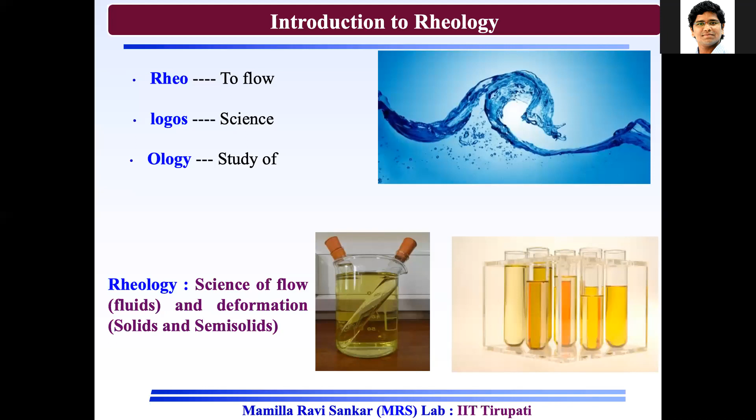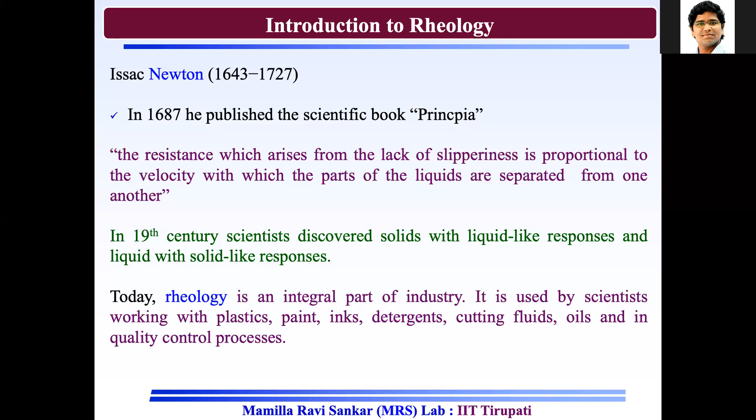Today, rheology is an integral part of industry, and now it is also an integral part of academia, because many academics, especially chemical engineers, biotechnology people, and nowadays mechanical people also use a lot of rheology for their research. So people know what rheology is.

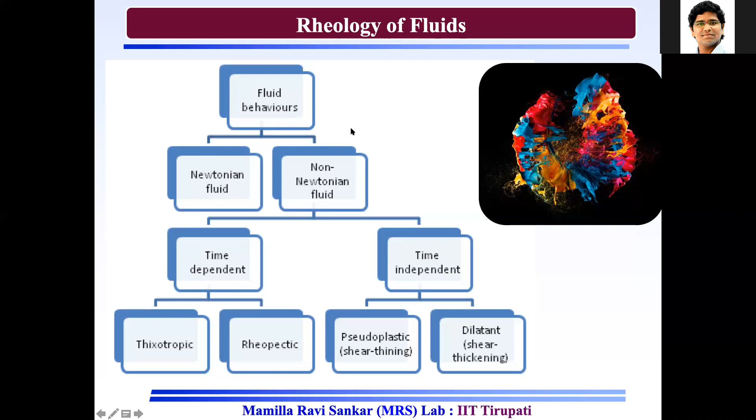Okay. But what I can suggest to you is, in most cases, people talk about the non-Newtonian only, because most of the things that we daily encounter are basically non-Newtonian fluids. If you see here, shear rate versus viscosity, or some people also plot shear stress. You can see this is proportional. Normally in rheology, people say shear rate. So always one word in between shear and rate is missing. Okay, but in common language, they call it shear rate, but it is called shear strain rate. So whenever I say shear rate, it means shear strain rate. Okay, so when shear rate is proportional to viscosity, normally you can call it a Newtonian fluid.

So as the shear rate increases, if the viscosity goes down, if you can see here, that is called a shear thinning fluid. If the viscosity increases, that means shear thickening fluid. How the viscosity increases, how viscosity decreases, and other things you will come across in the upcoming slides.

If you know how a rheometer looks like, then you can understand what the shearing effect is and whether this shearing effect is decreasing the viscosity or increasing the viscosity. If it is decreasing, what is the phenomenon? If it is increasing, what is the phenomenon? And other fluids are, you can see, Bingham plastic fluids and other things. In the Bingham plastic fluid, normally these are the Casson fluids.

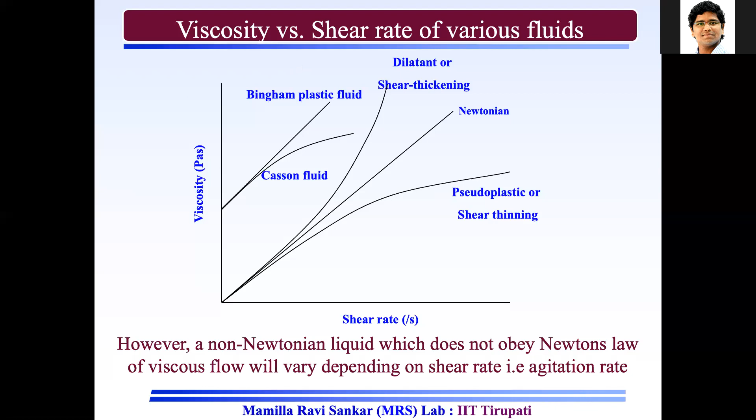These are viscoplastic fluids. Okay, so you can see they are starting at a certain point on the y-axis. Okay, so that is nothing but your minimum viscosity or the shear. Normally it should be a shear stress on this y-axis. If you assume that you are taking a paste and putting it on a brush, unless you exert some pressure or some stress on it, the flow of the paste won't start. That is the best example for these Bingham plastic fluids. Okay, so that is a common example.

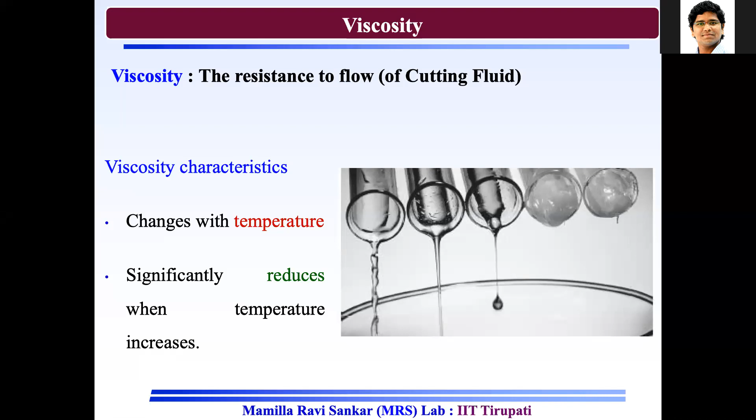So viscosity, as you can see here, is a resistance to flow. As you are seeing in this particular picture, the flow of the fluid is very high in the first one. As you go on to the last one, the flow of the fluid is minimal. I cannot say zero, it is minimal. That means the viscosity is increasing gradually. So how to measure rheology, or how to measure various rheological properties, that we will see in the upcoming slides.

So there are tests. In olden days, people used to do rheological characterization by qualitative tests. A qualitative test means, for example, X person is a good boy. Okay, that is a qualitative statement. What is a quantitative statement? X person is 80% good boy is a quantitative statement. So people in olden days followed qualitative tests.

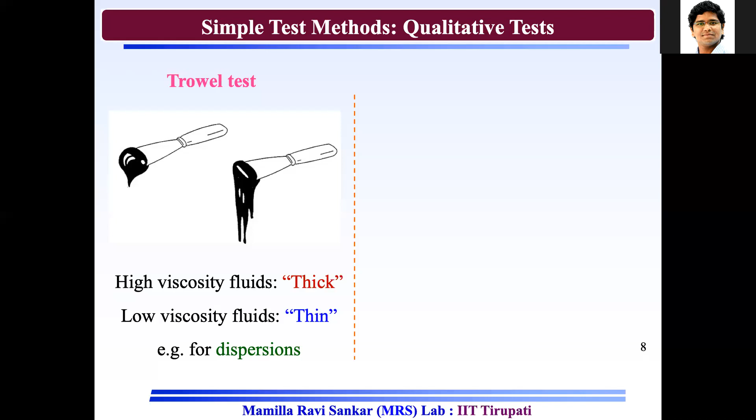How? That is called the trowel test. What they will do is take a trowel, pick up the fluid, hold it for some time and observe it. The only thing they can say is, they cannot give the quantitative value, for example, 100 or 200 or whatever. Okay, they can say whether it is a thick fluid or a thin fluid. That much is called qualitative. They can say this is a thick fluid or it is a thin fluid.

So there is another test. If you don't have the trowel and other things, you can do the finger test. So tacky for long distances, less tacky for shorter distances. Okay. So don't do this finger test because of the COVID effect and other things going on. Okay. So olden days people were not aware of all these things and they used to do it. So this is one of the conventional ways of qualitative testing.

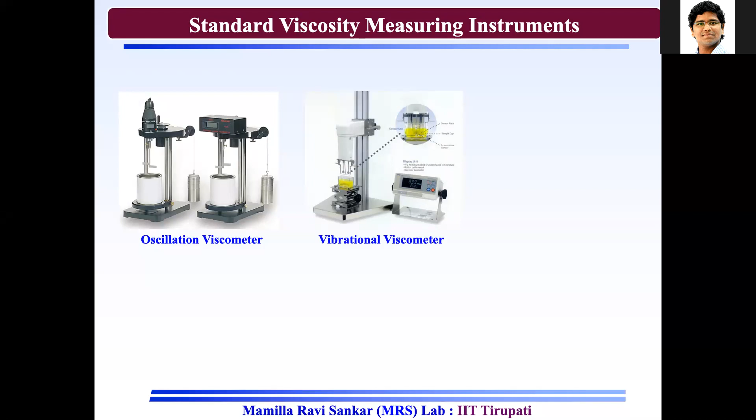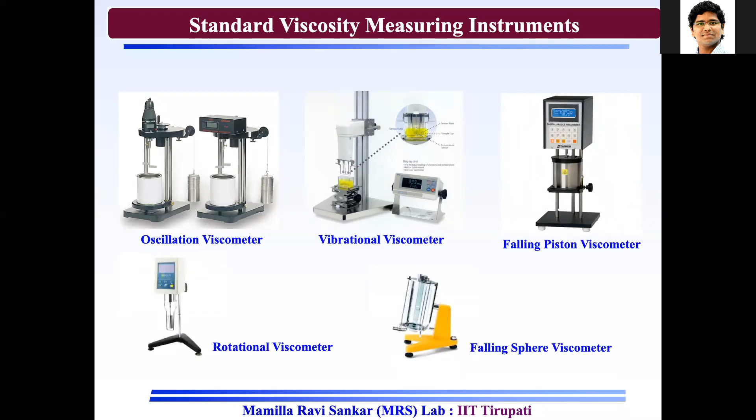Okay. Standard measurements were found later, because whenever your customer comes to you, they will ask what is the viscosity of it, what is the shear stress or shear strength of this particular material and other things. Okay, for that, as time progressed, quantitative measurement techniques came. One is the oscillation viscometer, vibrational viscometer, falling piston viscometer, a rotational viscometer, as well as a falling sphere viscometer. These are the varieties, particularly for the measurement of rheological properties. Among all these, nowadays the most popular is the rotational viscometer.

Okay, in the rotational viscometer, you can go with TA Instruments or Anton Paar or any type of commercially available rheometers. Most of the people will go for three common geometries: parallel plate geometry, cone and plate geometry, and concentric cylinders. Whenever you have a liquid, you should prefer concentric cylinders. You can also prefer cone and plate, but cone and plate and parallel plate are normally preferred for semi-solids.

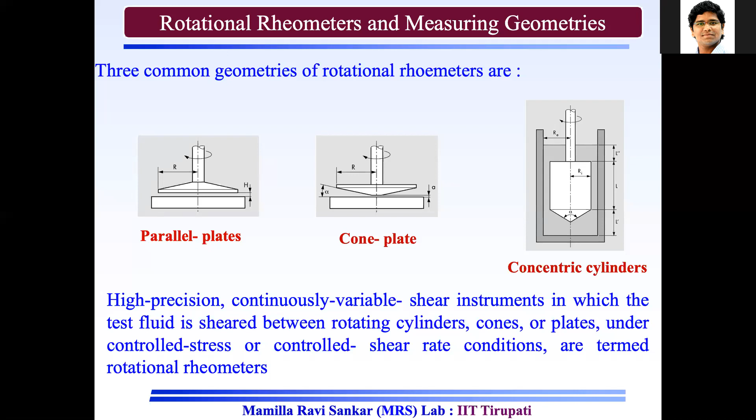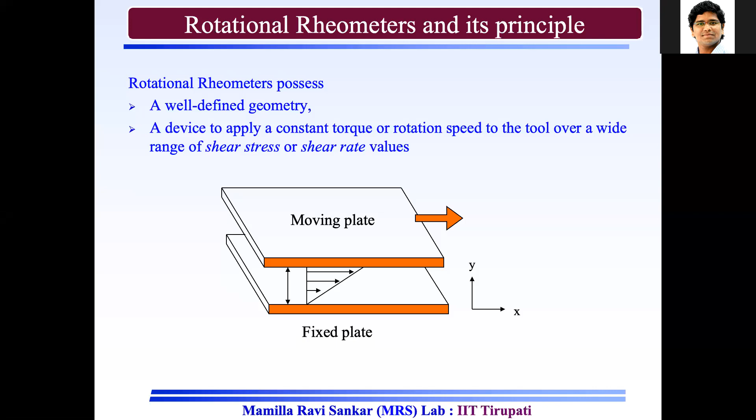Okay, so this is about the geometries that you can use, particularly for the basic characterization of the rheological aspects. As I said, rotational rheometers are mostly used across the globe. That's why I am concentrating mostly on rotational viscometers. At the same time, most of the fluids that one person or many persons come across in daily life, from eating food to all the things, are mostly viscoelastic fluids. That's why most of my presentation goes with viscoelastic fluids with rotational type of rheometers. Okay, so why are rotational rheometers mostly famous? These are well-defined geometry, and this device applies constant torque or rotational speed, and it maintains symmetry, and many advantages are there that you can see in the upcoming slides.

There are multiple modes in the rotational viscometry or rotational type of rheological characterization. Whatever you are seeing is an Anton Paar, which is one of the world's best-selling rheometers, which we also have in our laboratories. So one is the rotational type where you have a top plate and bottom plate. These things you will see in the schematic images in an upcoming slide. If you can see my cursor here, there is a tool master, and there is a bottom plate. The bottom plate is fixed, and the tool master can be rotatable basically.

Okay, so it can be operated in two ways. One is rotation. That means that continuously you can make a circle out of it. That is for shear stress test and basic viscosity test. Another one is dynamic, called oscillation, that you can give. So the bottom plate is fixed, in between you have a semi-solid medium, and for the top plate you are giving an oscillation motion. Whatever motion you are seeing here is for the top plate only. So these can be tested for the torsional test, tensile test, shear test and other things.

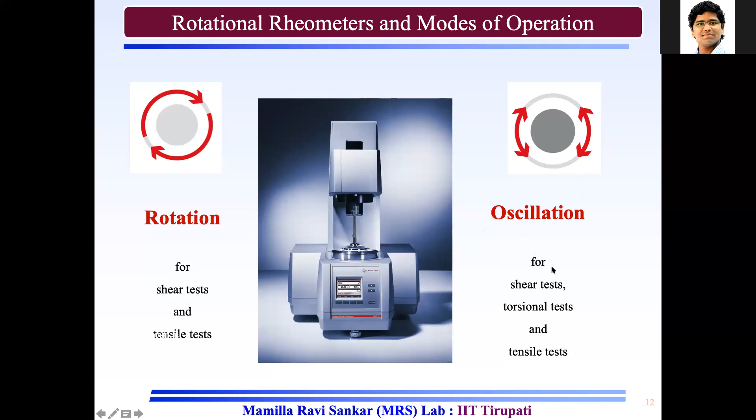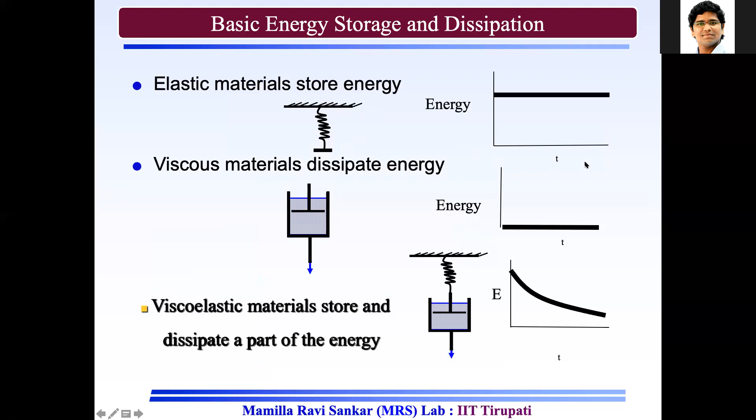So, rheology of viscoelastic fluids. Why are you going to use the viscoelastic fluids? Normally these viscoelastic fluids have two variations: one is viscous and another one is elastic nature. Viscous materials normally dissipate the energy, elastic materials store the energy, but these particular materials have both viscous and elastic natures. How do these things dissipate the energy? Normally these are long chain polymers, represented by polymer networks or polymer chains basically. These chains can store energy if they are elastically dominating. If they have the viscous nature, that will release.

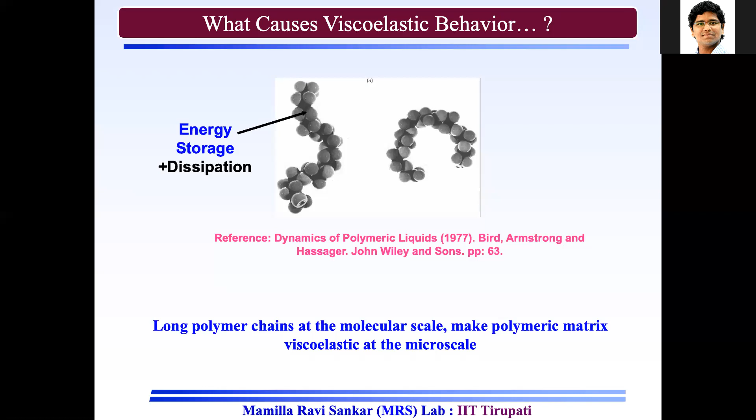Okay, so for example, water is viscous dominating. As you throw it, it will follow the path of whatever direction you give. But if you take an eraser, if you sit along with your children and they are erasing their drawings, and you press on it, what will happen? It deforms in the perpendicular direction. At the same time, it will store the energy inside. Okay. So why are we going for mostly viscoelastic fluids?

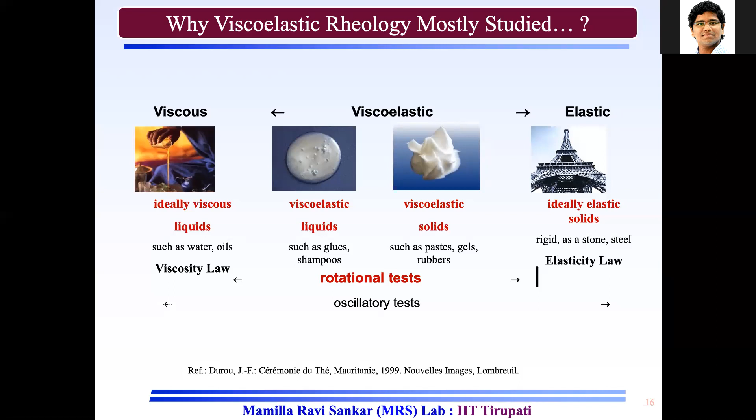As you see, ideal liquid is normally water, and ideal solids are perfect solids. There is nothing like perfect in practice. In between, you come across many materials. Those are all mostly viscoelastic things. In the viscoelastic, you have two varieties: viscoelastic liquids and viscoelastic solids, which is nothing but the semi-solids basically. If you see the range of face creams, whatever you apply, Fair and Handsome, Fair and Lovely, these are all to be tested rheologically, because it has to flow as per the requirement. At the same time, it has to rub against your face. It has to rub against your body. So these are all to be tested properly as far as rheological studies are concerned.

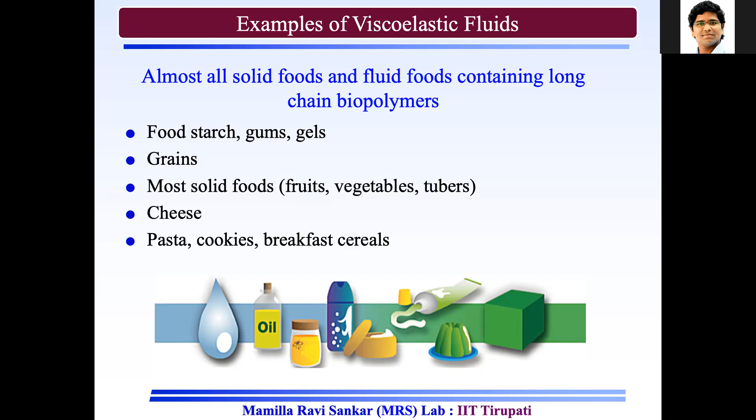Almost all the solid foods and fluid type of foods, ranging from food starch to gums, grains, most of the solid food, cheese, pasta, all come under the one category called viscoelastic fluids. That's why we are concentrating mostly on viscoelastic fluids and semi-solids. At the same time, I will also give you one glimpse of the future of rheology, where people can get some knowledge and go ahead further. That is called biorheology, where bioorganisms and the viscoelastic or rheological fluids are incorporated. That also I will talk about in the final slides. So, three things that I am going to start here.

What are the practical conditions that we exclusively do at our particular laboratory and our collaborators' laboratories? So first and foremost is the basic thing that I want to start, where liquid characteristics are dominating. However, these fluids are slightly viscoelastic. So second is polymer rheological fluids for finishing applications. So these are dominating viscoelastic solid characteristics.

The first one is elastic liquid characteristics. Second one is viscoelastic dominating solid characteristics. Then we will go ahead with bioinks or injectable scaffolds, hydrogels and other things, how the cells and other things can be done by the rheology.

These are the applications. Why I am concentrating, as I said, basic rheology you can get at any time from YouTube and other things. Only thing that you may not get, as per my understanding, is practically how you can use the basic knowledge of rheology in practical applications. Many of the people, when you ask what is a null set, tell the definition, but how to use it in practical situations of sets and relations may not be known.

For example, you can correlate if a person is standing and we take a photograph. So a person is 3D and the photo is 2D. So what about the points that are there on the back side of the human? Those are all points going to the zero of the photograph. So this is how the practical knowledge can be incorporated among the students. So my motto was to explain to you the practical conditions of rheological characterization to the basics of mechanical engineering.

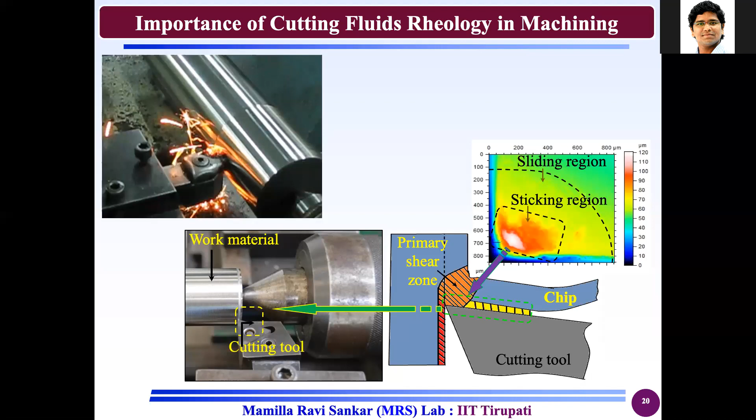Now, I want to use the cutting fluids. If I want to use the cutting fluids, being a basic mechanical engineer, what you will do is just go and use the cutting fluid and measure the cutting forces, temperature and other things. People are not interested in all those things if you are going for a publication. So what I strongly suggest to the people who are observing is, you should also look at the other angles of cutting fluids outside the box of the machining. That is one of the things that you can see, rheological characterization.

And you can use various cutting fluids that you are going to generate. You can generate your cutting fluids as per your requirement. If you know the thermal conductivity and the convective heat transfer coefficient of each particular cutting fluid, you can mix and make a blend. And people nowadays, I am seeing and reviewing many publications on bio-cutting fluids or green cutting fluids. So in this particular case study, what we are going to do is compare the rheological characterization of commercial mineral oils that you can get from the market. For example, I am not branding, Servocut S, Servocut SS. There are many companies.

Bio-cutting fluids, you can develop your own bio-cutting fluids, and the only thing is that you should characterize them properly. In the present condition, what you are seeing is an Anton Paar MCR 102 model, and rheological characterization is done with a concentric cylinder. As I specifically said, whenever you have a cutting fluid or a liquid-dominating fluid, you should always go with concentric cylinders, and this is the concentric cylinder.

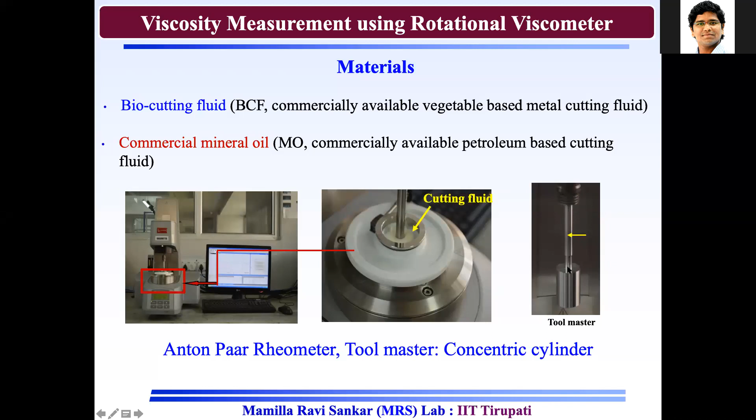As you can see, the cutting fluid is filled as per the guidelines of the rheometer, and this is the tool master, the concentric cylinder tool master. If you see here the shear viscosity, normally you are doing a shear test, so you also observe the shear viscosity versus shear rate. How to measure shear rate and other things you will see in the upcoming slides for abrasive fluids.

Normally shear rate is one of the input parameters that you can give on the rheometer, and you can see the first test is conducted at room temperature, which is about 20 degrees. There is not much change in shear viscosity; it is constant. However, metal cutting fluids normally will experience high temperature. So we also conducted one test at 100 degrees.

You can see the viscosity will increase because in the present condition we are using water also. As the temperature goes up, the water content will decrease, and it will be slightly difficult, from the point of capillary action, to impinge or penetrate into the chip-tool region. Otherwise, what you can use is high pressure coolant systems to penetrate in a much better way.

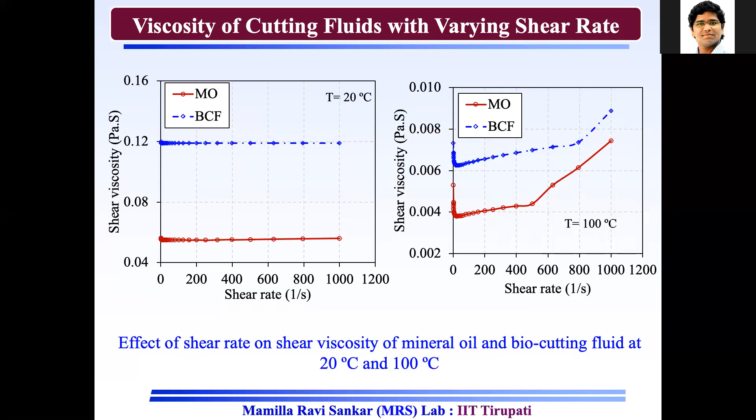You can also check how the viscosity is decreasing and other things. What you are going to see here is the viscosity of the mineral oil and the viscosity of the biocutting fluid. Both are approximately similar in range. Why I am saying this is, if you look at the sustainable aspects of machining, you always prefer to go for biocutting fluids.

There is one conference, at BITS Pilani campus, but they are organizing it in Jaipur, on sustainability issues. That is one of the big conferences organized by CIRP. People who are interested can look at it. Unfortunately, the last date is tomorrow only. I was just informing you; life cycle assessment and other things people do.

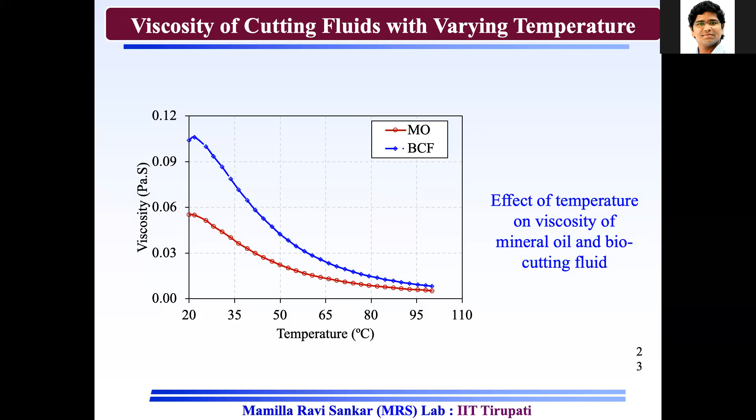From that temperature analysis, you can calculate the activation energy, the apparent activation energy. You can calculate it for BioCut using these equations, which is the Arrhenius equation. What I mean to say from this data is that the activation energy is the energy provided to the cutting fluid. You have two fluids, one is the biocutting fluid, another is a petroleum-based cutting fluid.

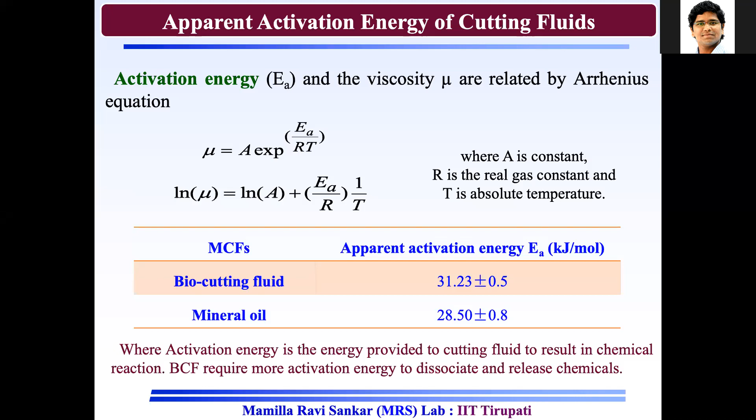For these two cutting fluids, if you use 28.5, that means it is going to react and give off chemical gases. From the point of view of emissions, which is dangerous, you have to understand two angles. One is that dangerous gases are going to evolve at a low activation energy for the mineral oil. But the biocutting fluid that we have developed and used requires more energy to dissociate and give off gases. However, the green cutting fluid has a better composition, so there won't be much danger from the point of view of gases.

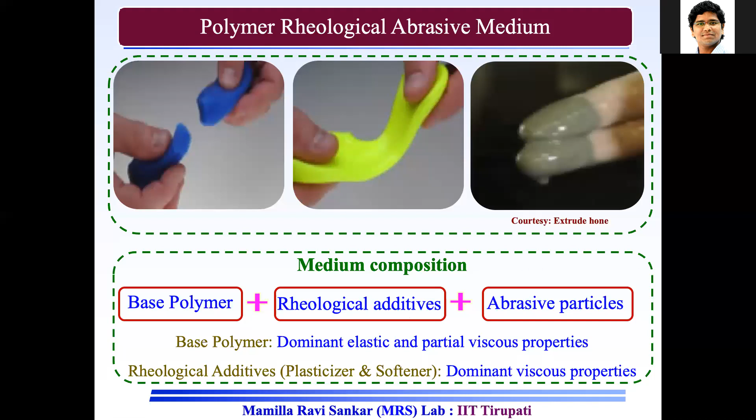At the same time, this composition will have base polymers and rheological additives, because you have to play with the rheology. In our case, whatever the patented technologies that we have, we need a minimum of 8 to 10 ingredients to make this particular medium a viscoelastic thing. Okay. So you can see here the basic thing that I want for the rheological fluid.

If complex contours are to be polished, you cannot polish them with solid tools. These are to be polished by rheological fluids, and these rheological fluids should have viscoelastic nature. Why viscoelastic nature and other things we will see in a couple of slides later. Okay, so this particular medium should have three minimum properties. One is self-deformability, and deformation is one of the properties of rheology, and better flowability. That means that flow and deformation is nothing but the rheology.

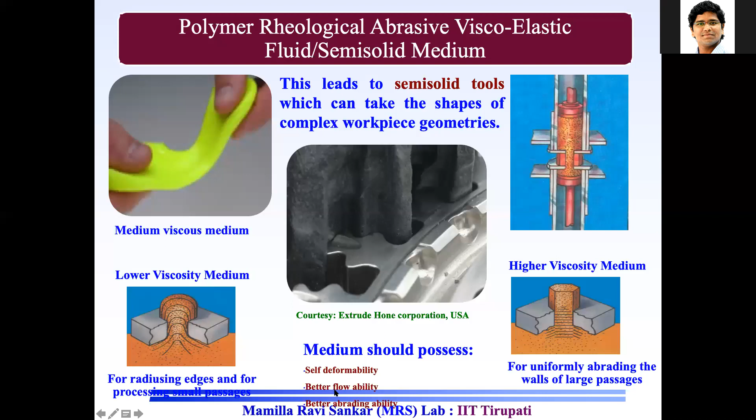So it should have self-deformability. Deformability is a part of rheology. Flowability is a part of rheology, and better abrading ability is an additional feature that we want. How to come up with it? You can see here, our viscoelastic fluids are placed and some pressure is applied. Now I was telling you that we want viscoelastic nature.

You take the polymer. Hope you are seeing my cursor. There is a red square here. I am taking a viscoelastic element here. If I apply certain pressure or a shear force, what will happen? There will be a motion along the shear force and perpendicular to the shear force. Along the shear force is because of the viscous nature, and perpendicular to it is radial. That is nothing but your elastic nature.

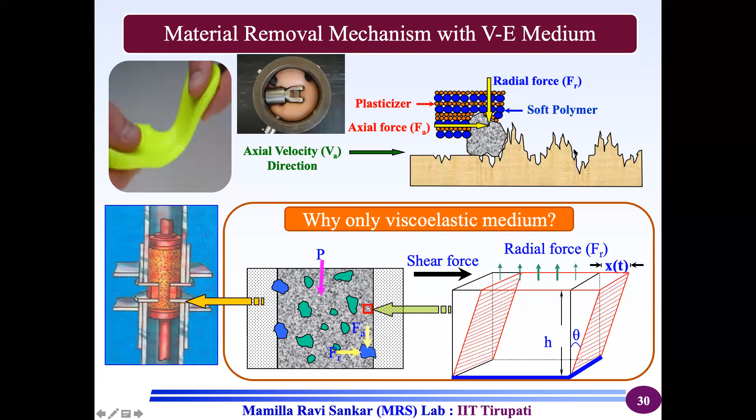As I said, you take water and you take an eraser. If I put water along the shear force direction, what will happen? The water will flow along the direction. But if I press in one direction, it will move in some perpendicular direction. So that technology has been adopted in the viscoelastic fluids, and you can see here, for that purpose, you have an abrasive particle here. We have a viscoelastic medium. Because of the viscous nature, you are going to get axial force. Because of the elastic nature, you are going to get a radial force. These two are going to apply simultaneously so that you are going to finish the surfaces. These are the probable technologies that most people use for finishing fluids.

It behaves like an elastic ball. If I make a spherical ball and hit it on the surface, it jumps like a ball. It breaks like a plastic piece. That means that whenever you are pulling at very fast rates, it is going to break like a plastic piece. So the same medium which the finishing people are developing flows like a fluid, jumps like an elastic ball and breaks like a plastic piece. These three are unique characteristics, and you need to quantify all these things.

How do you quantify? You can only quantify by rheological characterization. So how do you do the rheological characterization? You can do it by steady state rheology, where it is independent of time, and dynamic rheology. In the steady state rheological characterization, you do the flow properties as well as the creep compliance and creep recovery test and other things. And in the dynamic test, you can do the stress sweep as well as the strain sweep, frequency sweep and other things. You can see here the schematic, which you might not have understood in the previous slides.

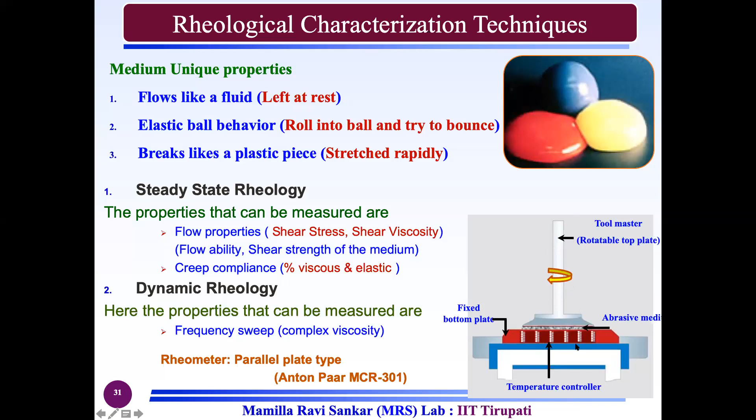So shear stress of any material, for example, aluminum alloy, silicon carbide, or a metal matrix composite, you know the shear strength of the material. So you need to know that particular material composition. Whenever you are applying shear stress, it should be higher than that strength. Then only material removal will take place. So now the most important thing here is how to measure the shear rate.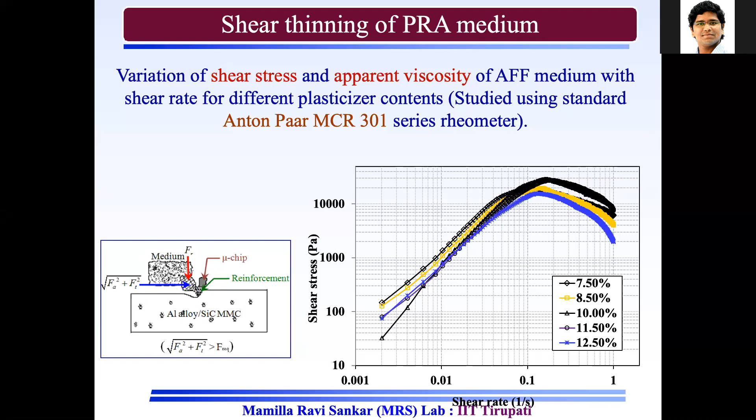For example, in my condition of abrasive flow finishing, I use our own system to measure the shear rate. How to measure? There is another variety of rheological characterization called capillary rheometry. In this, you make a chamber where you put your fluid and apply your extrusion pressure in the setup itself. In abrasive flow finishing you can apply it and collect the discharge. That means shear rate equals 4V by πR cube T, where V is the volume of material that you collect in the collector, T is the time, which gives the discharge, and R is the radius of this particular tube.

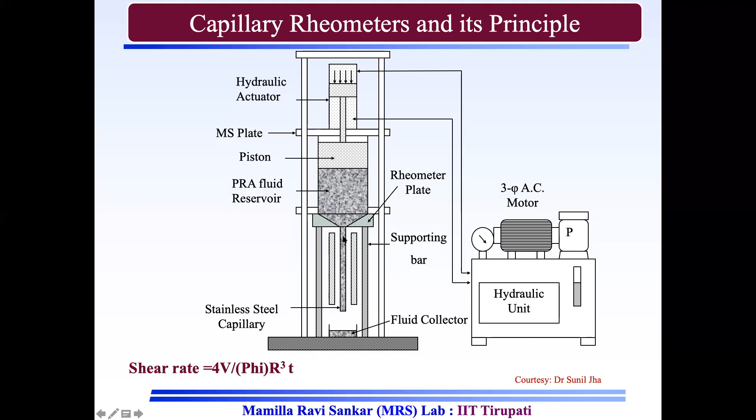Practically, this particular tube normally will have a length to diameter ratio of more than 1:18. That is a normal thing on the rheological aspect. If you want to know the basics about rheology, you can study the book by Professor Macosko. Now we have measured with respect to various plasticizers. Normally plasticizers are low molecular weight materials, but you don't need to bother about all these things. Using the equations we have seen in the capillary rheometer, we can measure the shear rates.

Now, from this experiment, the most important thing is measuring the shear rate, and you have to observe the range of shear rates in which your particular experiment works. You may measure the shear rates in one range and do your further experiments in another range. That should not happen. So my shear rates are in the range of 0.04, and assuming for the safe side, 0.03 to 0.1 or 0.11. This is the range of shear rates. Once I know the shear rates, I give some tolerances on both sides and measure the rheological properties.

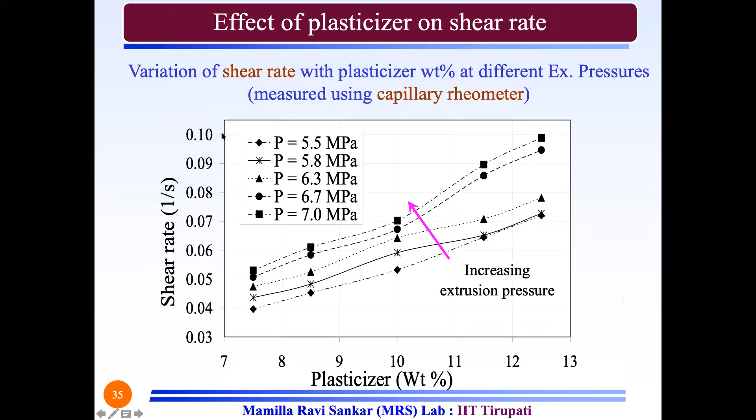That is the ultimate. But if there is a minute breakage, still okay. That means if you see my previous one, my range of experiments is below 0.1 shear rate. So if I see the shear rate ranges below 0.1, I am observing there is no breakage or minimal breakage. That means that my experiments are conducted with the better polymer molecular chains or better polymer networks.

If you see among the curves here, now observe all the curves, and you see here 7.5 plasticizer to 12.5 plasticizer. As I said, polymers are high molecular weight materials and plasticizers are low molecular weight materials. If you see from 7.5 to 12.5, the viscosity is reducing. Why is the viscosity reducing?

It is reducing because of low molecular weight materials, that is plasticizers. You can see at the bottom, in the initial stage, these blue lines which are non-linear lines are nothing but my polymer molecular chains. When I am mixing or blending with low molecular weight materials like plasticizers, what will happen? Low molecular weight materials try to go between or penetrate between high molecular weight polymer chains and try to kick them apart. So the interpolymer molecular distance will increase and interpolymer molecular strength will decrease.

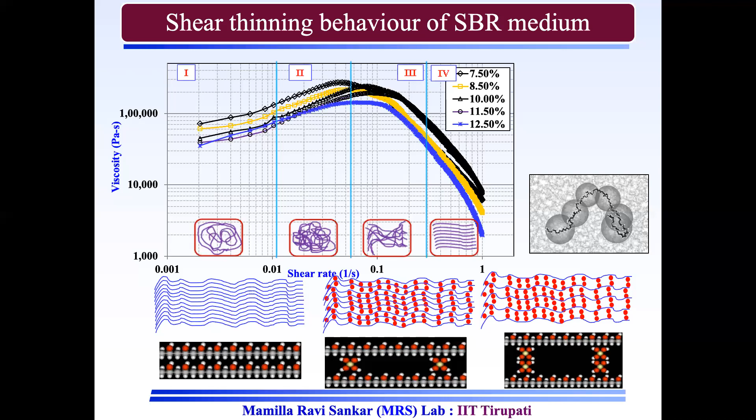In normal cases, polymer chains will have dominating elastic characteristics. By incorporating plasticizer, I can manipulate or imbibe the viscous characteristics. Now, how much viscous characteristics I want to imbibe will be known from some of the other rheological characterizations. But from this particular curve, as you increase the low molecular weight polymers or the plasticizer, which are nothing but the oils, the distance between polymer molecular chains increases, and the interpolymer molecular force of attraction will decrease. That means that you are imbibing the viscous nature to a dominating elastic characteristics polymer.

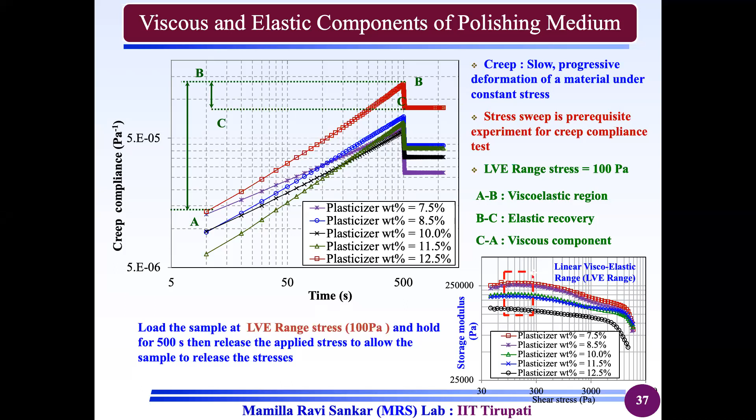I can find my viscous nature. So from this particular curve, I can understand what is the radial force that particular medium is going to put, and what is the axial force it is going to put. So you can see here, the viscous component we have measured, and as you can see here, the viscous component is very less. What is happening? That means your elastic component is more. Elastic component is more means your radial force is very more. That means that indentation is very more.

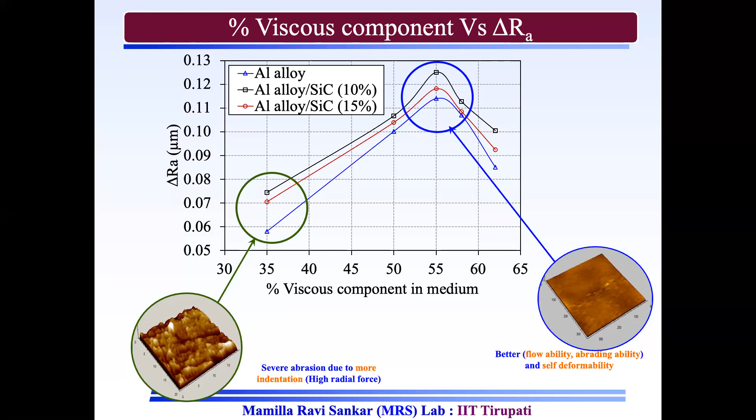That's why you can see in the atomic force microscopy image that the indentations are more. But at a good viscous and elastic combination, you can get a nano surface. That means you are going to have better flowing ability because of the viscous nature, and better abrading or indenting ability because of the optimum elastic nature. These are the applications. You can polish the acetabular sockets and other acetabular heads for biomedical applications.

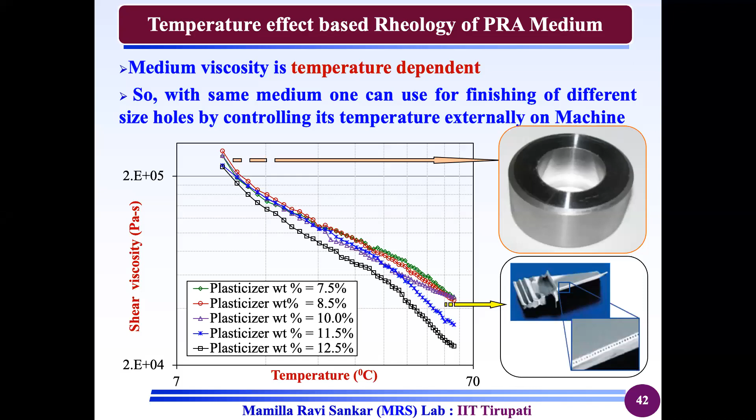So thermal aspects, as I said, temperature effect. If you see, as you increase the temperature, now what I want is, today I am going to use my particular fluid for big workpieces, knee implants and other things. Tomorrow I get a small component. How to do it? The abrasive flow finishing medium, the polymer rheological medium, can vary its viscosity. As you can see, today with high viscosity you can do big workpieces, and with low viscosity you can do turbine blades and other things. The only thing is that you can play with temperature, or have some temperature effect on your polymer rheological fluids, and you can do it.

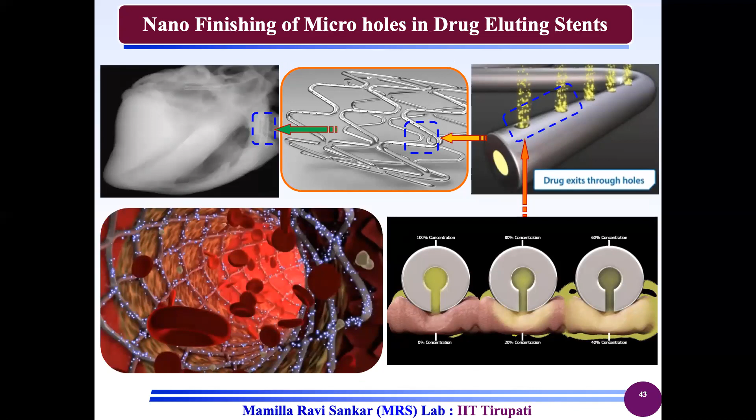So one of the projects that we are doing is drug eluting stents. As I said, we are extensively working on biomedical. This is one of the applications, micro machining and nano polishing of drug eluting stents. Many people are already working on this at IITs and many big institutes, and also some of the NITs. So what I strongly suggest is that you can venture into biorheology, that is nothing but the rheological aspects of biofluids.

For biofluids, for example, previously whenever people had a bone fracture, I am talking about small fractures, hairline fractures and other things. I am not talking about big fractures. That is a kind note for all the people. People used to have screws and pins and cortical screws and other things. Nowadays technology has grown. So what you can do is inject biodegradable thermosensitive hydrogels. Because of this thermosensitiveness, at room temperature it is a liquid, and at your body temperature of 37 degrees it will become a solid.

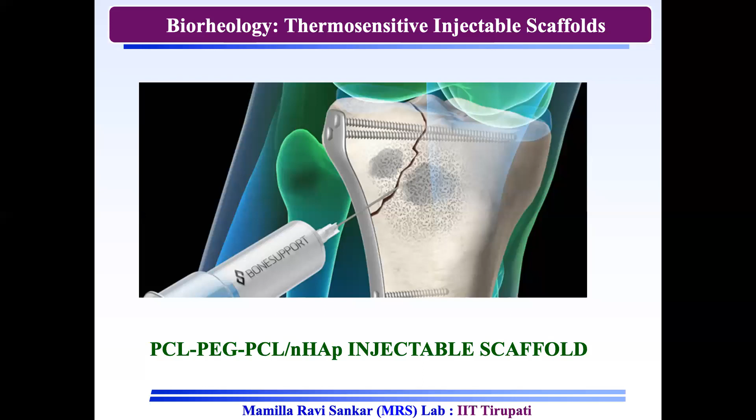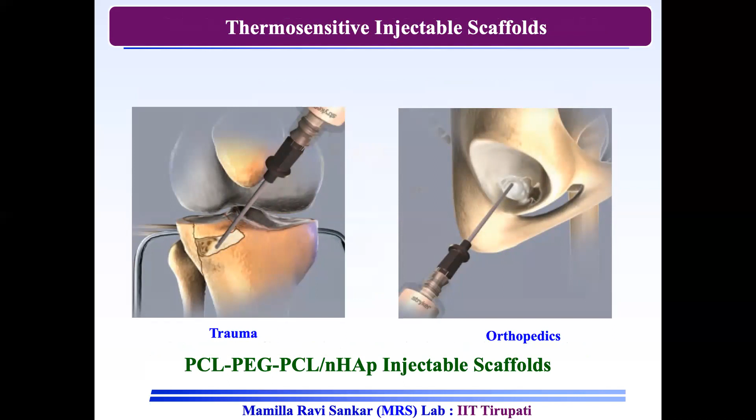But, as you know, the word but is very dangerous in English. Whenever this transformation takes place, this injectable scaffold, whatever you are injecting, is flowing between the bones of the male and female parts, at the same time deforming as per the complex bone fracture and solidifying. So flowability is there, deformation is there. The science of flow and deformation is nothing but rheology. And most important for injectable scaffolds, in biofluids, particularly as far as orthopedics is concerned, are the rheological aspects. If there is a bone fracture or any such case, you can inject and observe the rheological characterization.

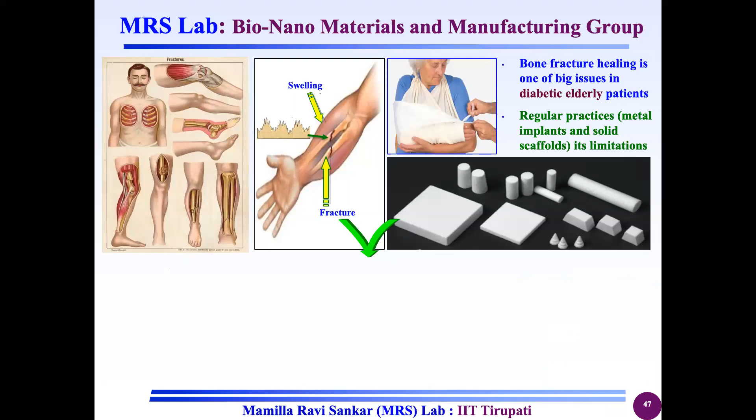What else have we done here? Many people talk about 3D printing and other things. In some places 3D printing won't work, because whenever you see a bone fracture, bone is a brittle material and its fracture is complicated, and if you see the surfaces, they have very minute nano surfaces. These geometries of nanoscale features cannot be developed by 3D printing systems. For that purpose, thermosensitive injectable scaffolds are nowadays coming up, and these scaffolds can be injected. Most important, I am not presenting the rheological characterization because the paper is under review.

So you can see here the PCL-PEG, that is polycaprolactone and polyethylene glycol based biopolymer hydrogels, and they have to basically become a semi-solid and a solid as per the structure of the bone fracture that has happened. You can see here injecting is taking place. If I want to inject, I have to understand the basic rheology, that is the flow properties and deformation properties.

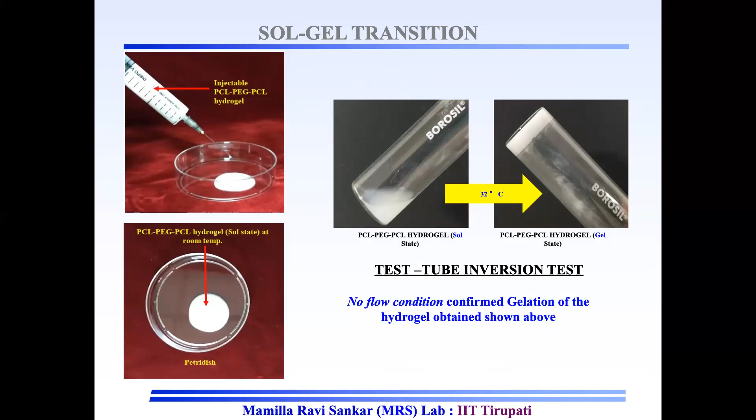As I said, people are using, nowadays, along with these fluids, the cells also. They will take these hydrogels, and they are also putting some stem cells of the body, and they are injecting them also. So the future is, if you can get knowledge, what we are doing in our laboratories is, we have knowledge about cell culture, we have knowledge about injectable hydrogels, we have knowledge about all these things. So you can also get this basic knowledge of injectables.

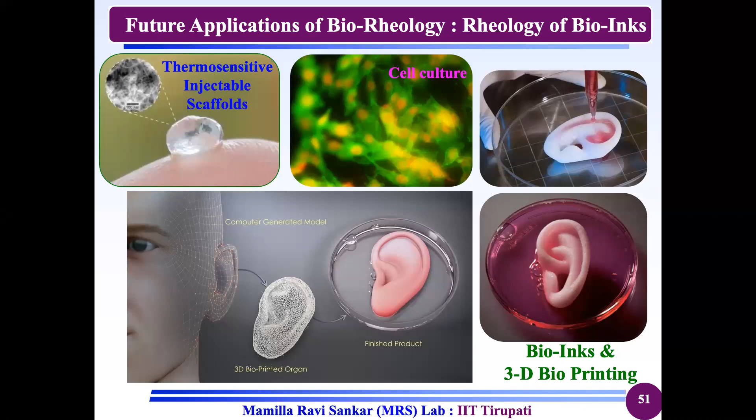Many of you may be experts in hydrogels, many of you may be experts in cell culture. So you can club together and you can make bioinks. Bioinks are one variety of hydrogels. People make one variety of hydrogels, and you can do bio 3D printing and other things.

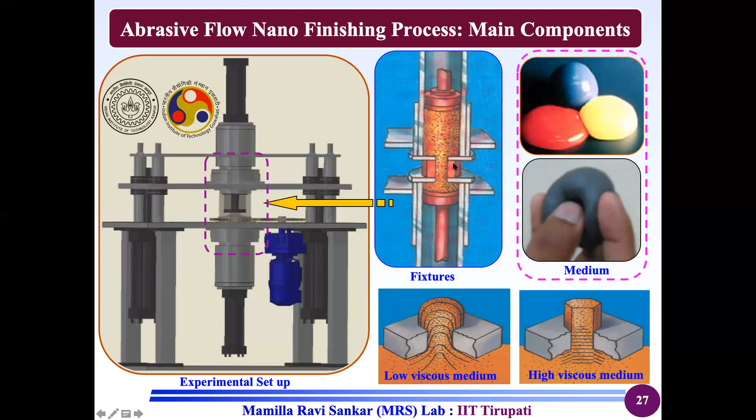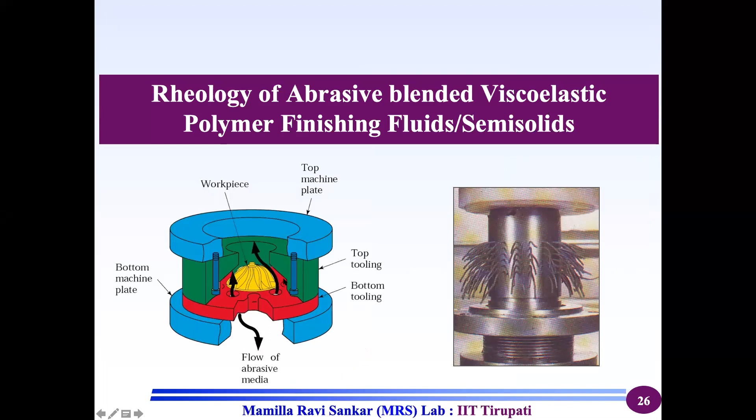Sir, I have one question. Please. Abrasive flow finishing process, is it only useful for internal surfaces or can external surfaces also be finished? Both, external as well as internal. That depends on how you are going to design your tooling. Just see here, there are three main elements in this particular slide. Because I am concerned about rheology, I have not talked about that. There is a tooling here. If I make a surface where I can flow my rheological medium to the external surfaces, I can do it. For example, in this particular case, I am finishing an external surface of my impeller. So how you design the tooling is most important. Okay, sir. Thank you.

We have one question from NSB. You are unmuted. You can ask your question.

Sir, could you give the practical application of abrasive flow finishing in mechanical engineering? I have given mostly mechanical only. You have quoted the example of a turbine engine blade. Can you show one practical? You can see a part here. This is one of the complex parts. Some of the parts we are doing for defense. We are in negotiation with many research laboratories.

So practically, wherever you require nano surface finish. For example, as I said, some of the gear systems you want in watches. I am doing some projects. Those components are coming, which I cannot deliver to you because those are defense oriented components.

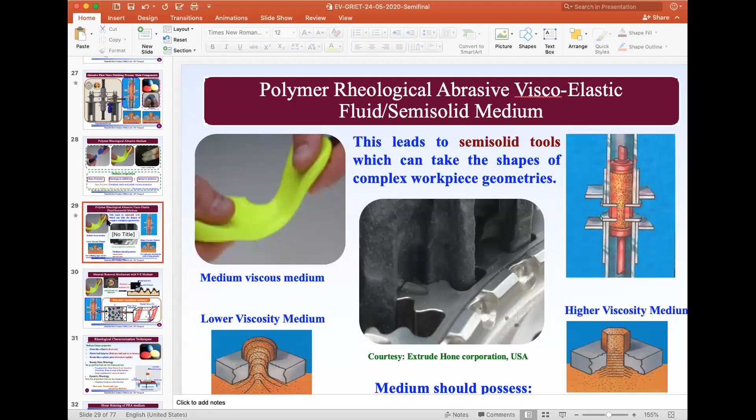Another thing, if I have a requirement of some filters with some holes and I want to polish these things, how do you polish? You need a very minute cylindrical thin cutting tool or an abrasive tool. That is very difficult actually. If you want to do from this side to that side, it also depends on the thickness, so there may be taper problems.

Sir, your work is on AFF. I have referred to your papers. In your practical experience, what kind of viscoelastic fluid is good? Which type of viscoelastic fluid is one variety of rheological fluid. Can you name one viscoelastic fluid out of your practical experience? Because I referred to your papers whenever there is AFF. You name some of the things, I will tell which is better.

What is your name? I am Professor Srinivas Babu, sir. I came to IIT Kanpur when Professor Jain conducted the FDP. I understand. You are from which institute? Vignan, Vignan Guntur. Very good. So you might have met me. Which type, what do you exactly want? I want to answer specifically.

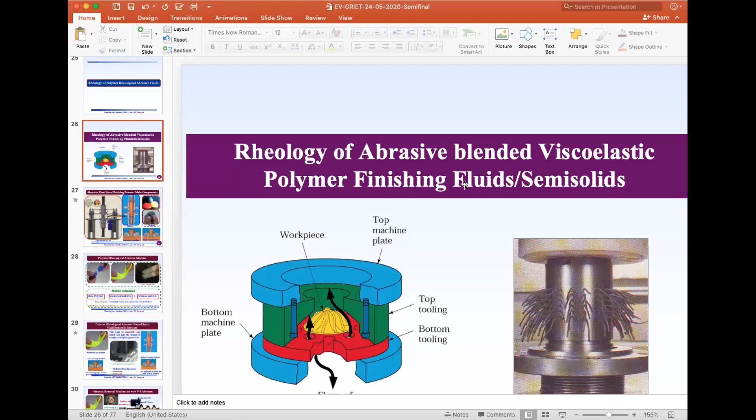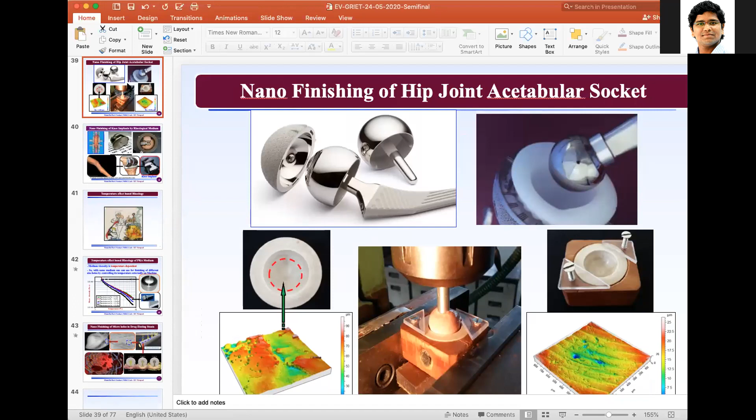In an open fixture, you mean to say this one you are talking about? Yes, this one, sir. You are from which institute? Whenever a person is asking a question, kindly introduce yourself and ask the question. Okay.